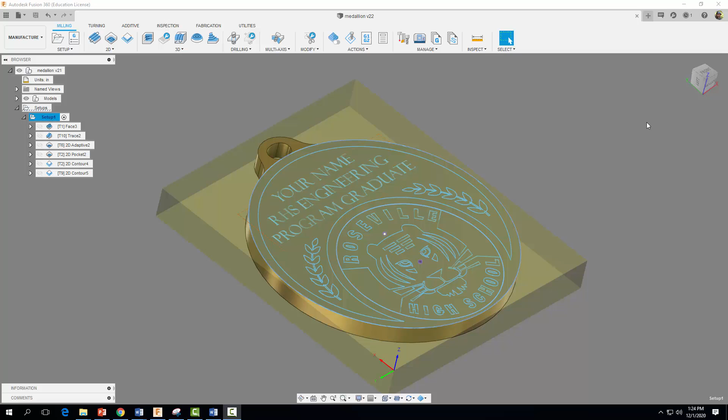Hey everyone, welcome back. In our last video, we learned how to do our first setup where we machined and manufactured our medallion here. Well, in this video, we're going to start our second setup and remove the rest of the material that's located underneath our medallion. So let's go ahead and get started.

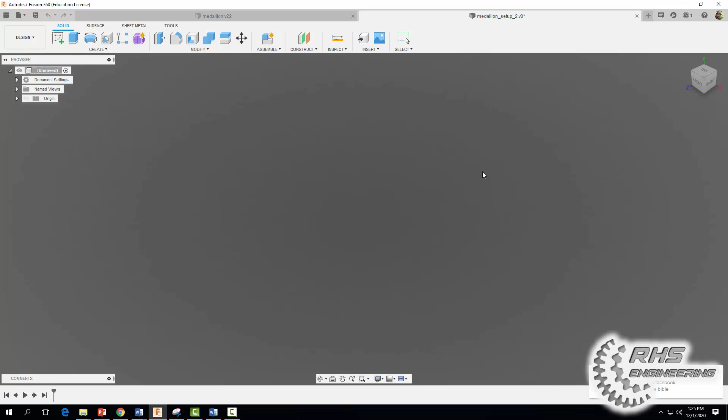We're going to come on up here and start a new design. We're going to go ahead now and save it as Medallion Setup 2. We're going to come on over here and we're going to show our data panel, and we're going to right click. You should have downloaded and uploaded this file into Fusion 360.

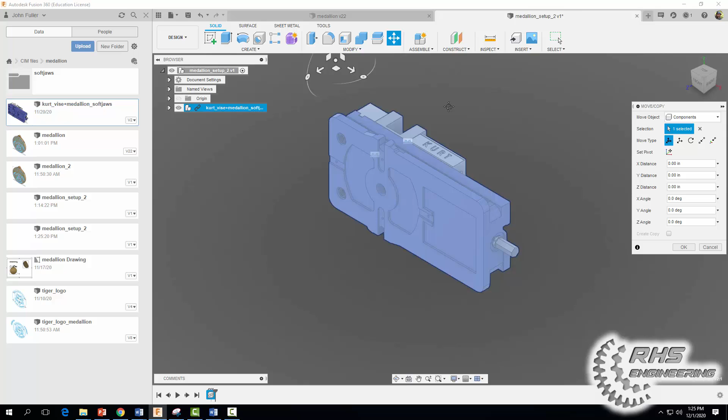It's the Kurt vise plus the Medallion Softjaws file, and we're going to go ahead now and right click and insert into current design. And I'm just going to rotate it 90 degrees, hit OK. Okay. And now we're going to use the medallion that we did in our previous video. We're going to right click on that guy and we're going to insert it into our current design. Okay, and I'm going to move it over into place here.

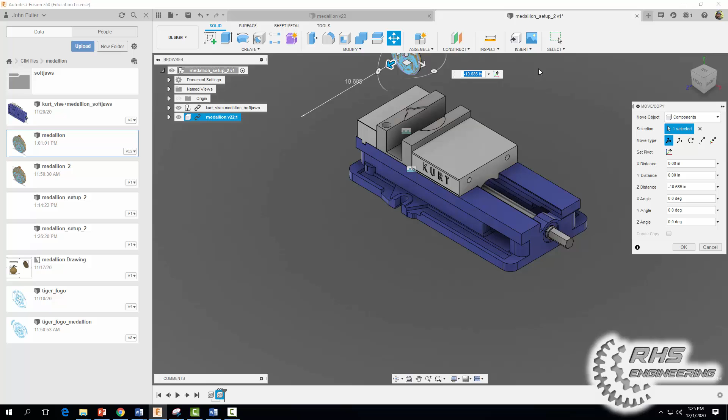And remember, we're doing the second setup, so we want the face of our medallion facing downwards so that it's touching our soft jaws. So let's go ahead and rotate it that way. And now we need to rotate it 90 degrees in this direction. Okay, I'm going to go ahead and hit OK.

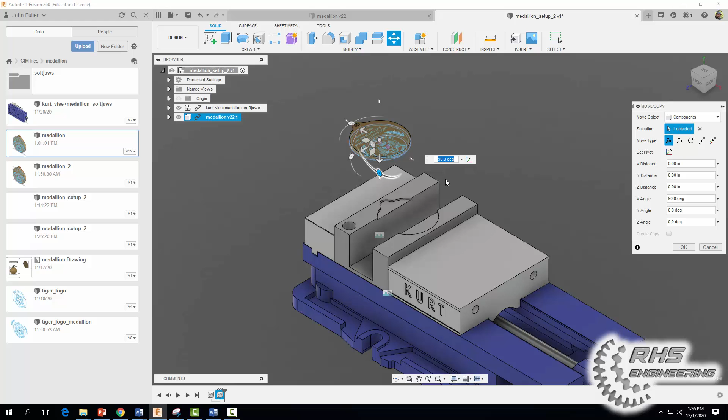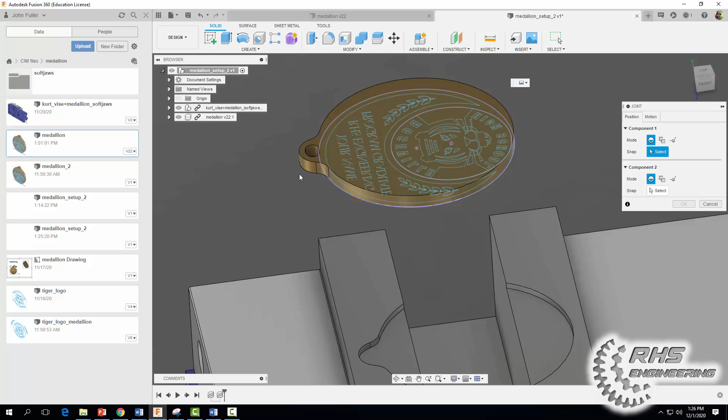And now we need to assemble it into our soft jaws using a rigid constraint. So to do that, come on up here to assemble, go to joint, and make sure you are selecting the rigid joint here. And now we need to find two corresponding points that match up. Okay, so I know that this tip of this medallion right here corresponds or matches up to this location right here, or point. Okay, go ahead and select OK.

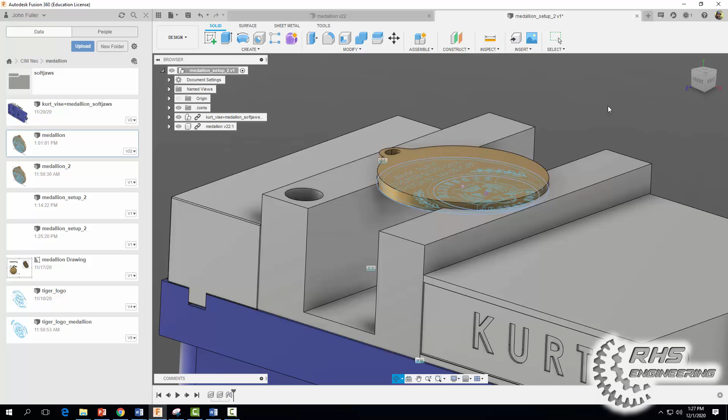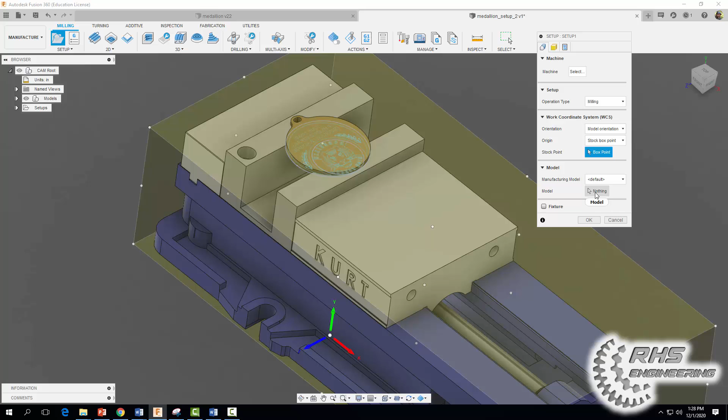Alright, so now that we have our medallion in place in the soft jaws, we can go ahead and start our second setup. So let's come on over here and change our workspace now to manufacture. I'm going to hide my data panel. Alright, so let's go ahead and start our second setup. Come on over here to setups, and we're going to do a new setup. And we're first going to identify our model that we want to machine and manufacture, which is our medallion. Okay, then we're going to come on over here to origin. We're going to select selected point, and we're going to select our boring hole in our soft jaws right there.

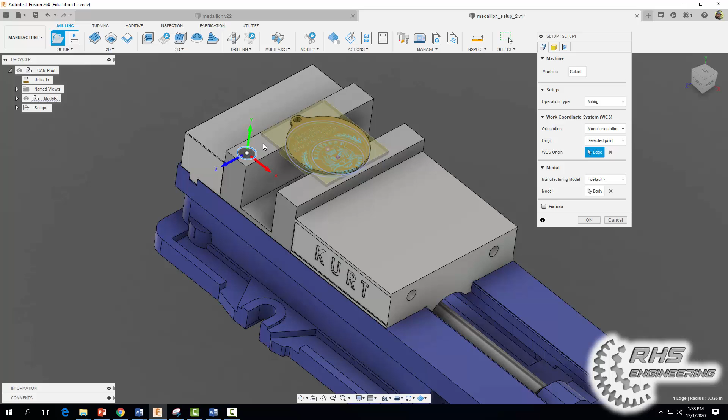Okay, and now we need to change our X, Y, and Z, our work coordinate system here, so that they're pointing in the right direction. So imagine you're standing in front of your vise in your machine. Remember, we need our positive X to go to the right, our positive Y to point away from us, and our positive Z to point up.

So we can come on over here to orientation, and let's go ahead now and select our X and Y axes. So it's saying, hey, your X axis, which one is it? Well, this line right here would make a good X axis. And now it's saying, hey, go ahead and select your Y axis. And this line right here will make a good Y axis. But we need our Z now to point upwards and our Y to point the other way. So let's go ahead now and flip our Y axis because we want our positive Y to point away from us, not towards us. So check that box, and now we're good.

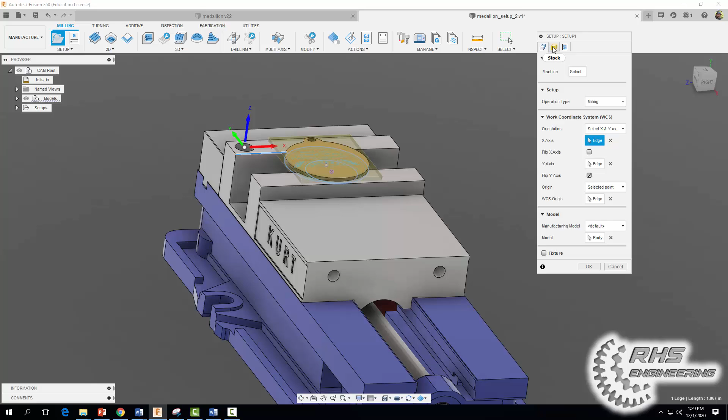Everything looks right. Now let's set our stock size. So change your mode here to fixed size box. Our width here for our X should be 3 inches. Our depth for Y, let's set that to 3.4 inches, just like we did last time. And our height now is not 0.5, it's going to be 0.375.

But remember, with our facing operation in our last setup, we shaved off 0.02 inches. So we need to set this to 0.355 because that's the thickness now. Okay, let's go ahead now and select OK. I'm going to come on over here and I'm just going to change our setup 1 now to setup 2 and hit enter. And then go ahead and save that guy.

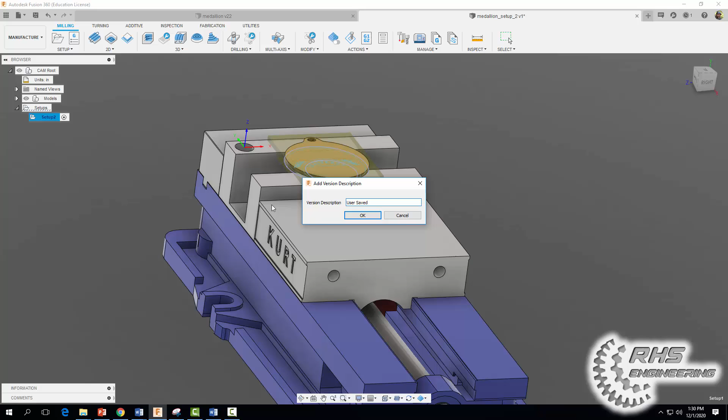So now let's go ahead and start our first operation. And you're probably thinking, oh, we're just going to go do a facing operation. But this time we're actually going to do a 2D adaptive operation first. And the reason is because we have these corners that are protruding out and sticking out really far from our brass stock material here.

And so what we're going to do is a 2D adaptive to sort of remove some of this material that's sticking far out, because when you're doing a facing operation first, sometimes these edges that protrude out can create really large chips and shoot off in all directions and could potentially damage your probes, your glass, your machine, or anything. So we're going to do a 2D operation first to sort of remove these big corners here that are sticking out.

So let's come on up, select 2D adaptive clearing. We need to select our tool now, and we're going to come over to our tool library. We're going to use our 1/2 inch 3 flute end mill here. We're going to select that guy, set our coolant to flood. Our spindle speed is going to be 5,000. Our cutting feed rate is going to be 30. Okay, all of our other default values are fine.

And for our geometry, we just want to click on that outer perimeter on the top. Okay, and we're going to come over to passes now. We're going to set our optimal load to 0.1 again, so that about 20% of our tool is engaged. Okay, and then make sure you check stock to leave.

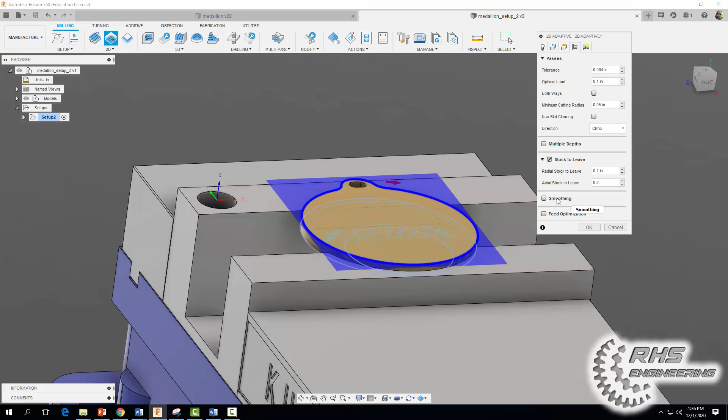For our radial stock, now this is important, we're going to leave not 0.01 or 0.02, but 0.1, okay? Because remember, the goal of this operation is just to remove the material that's sort of protruding out along these edges. And then for our axial stock, we're just going to set it to 0, and that should do it. Oh, go ahead and check smoothing and select OK.

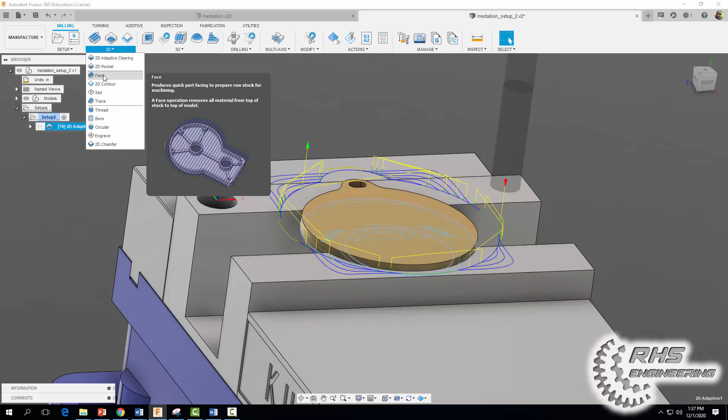And there you have it. Those corners have been safely neutralized. All right, and now we can start our facing operation. So let's come on up to 2D facing operation. Okay, and we're going to change our tool now to our facing mill. So let's select our Medallion tool library, select our 2.5 inch face mill that we always select.

And for our facing operation, we're going to set our spindle speed now to 4,000 and our cutting feed rate now to 20. Okay, all of our other default values are fine. For our geometry tab now, we're just going to select this guy right here. And then for our passes tab, let's use a pass extension like we used in our first setup of 1 inch, and a stock offset, again, of 0.5 inches.

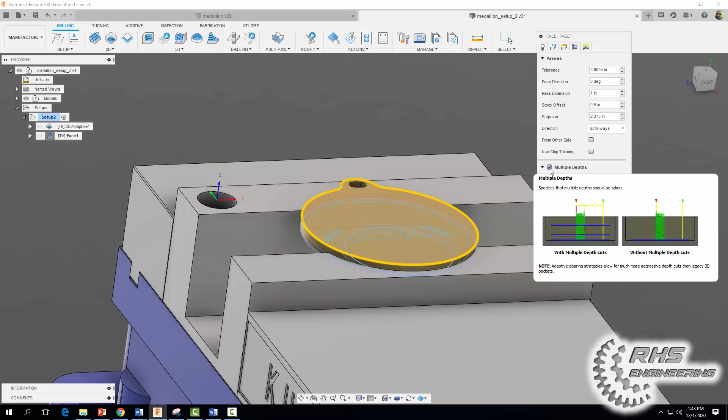But this time we need to check multiple depths, so let's go ahead and do that. And we're going to set our maximum step down here to 0.06 inches. What that's going to do is remove this top portion of material in successive layers. So each depth or layer, it's going to remove 0.06 inches of material. So that looks good. Let's go ahead and select OK, and you should end up with the following toolpath.

All right, and for our final toolpath, we want to do another deburring operation to remove those jagged edges along the outer edge and this inner portion here of our medallion. So let's come on up, let's do a 2D contour. We're going to change our tool now, and we're going to grab the 1/4 inch chamfer here from our tool library. Go ahead and select that guy. And we're going to set our coolant to flood.

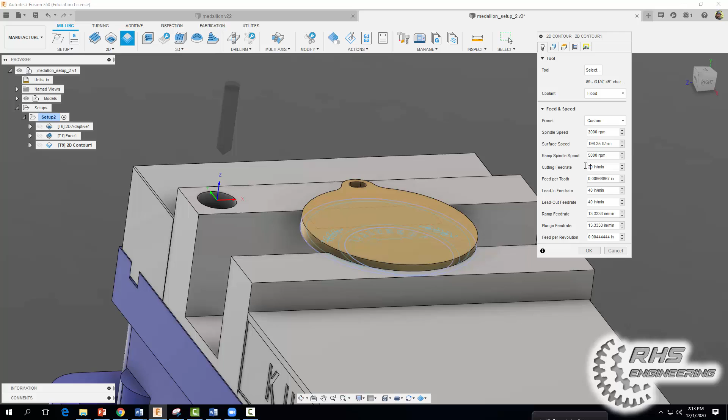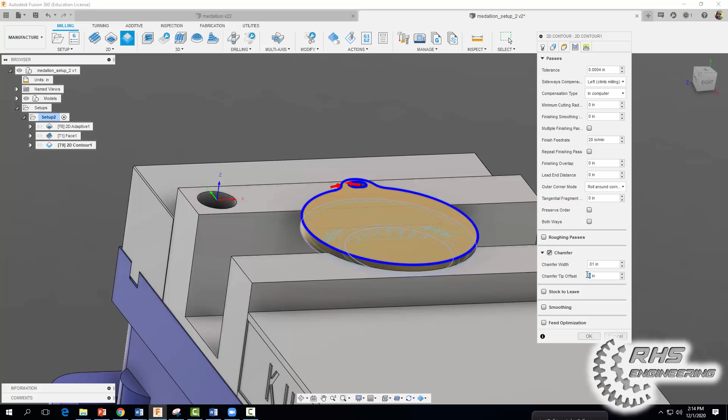Our spindle speed is going to be 3,000, and our cutting feed rate is going to be 20 inches per minute. And for our geometry tab, like I said, we want to deburr that edge, and we want to deburr the outer edge here. And then finally for our passes tab, make sure chamfer is checked. We're going to set our chamfer width. It's going to be a really tiny chamfer of 0.01 inches. And we're going to offset our tip a distance of 0.02 inches. Go ahead and select OK.

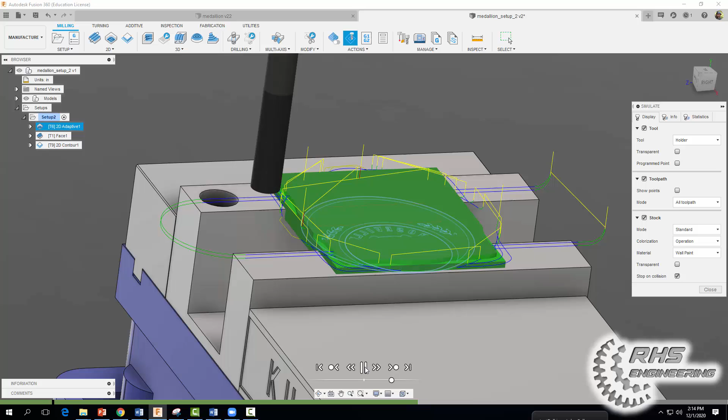And there you go. Your medallion is complete, both your first and your second setup. When you are finished, click on your setup, run your simulation, and make sure everything looks good. So remember, we removed those protruding edges with a 2D adaptive. And then after our 2D adaptive came through, we then came through with our facing operation.

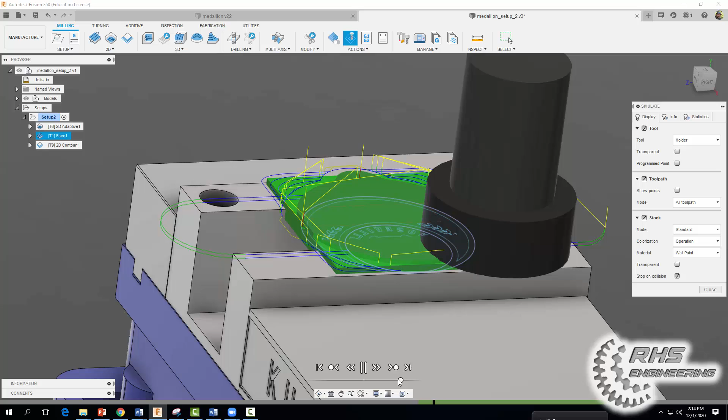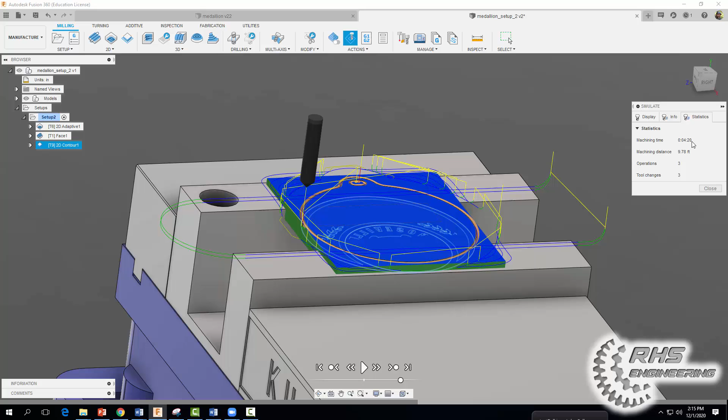Okay, 2 passes. And then we did a deburring pass along the outer edge here. Looks pretty good. When you're done, check your overall machining time. You should have a machining time of 4 minutes and 20 seconds. All right, and that'll do it for your medallion in this video.